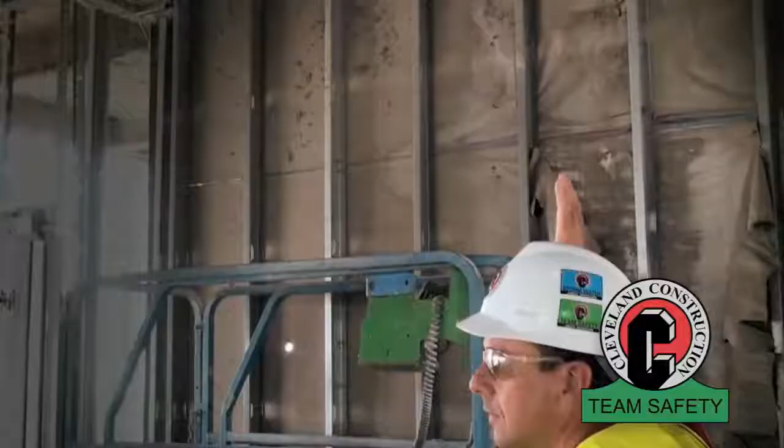To accomplish this, we believe it is extremely important to train each worker to examine their environment and become able to identify hazards, so that management can either eliminate the hazard or ensure that you're protected from its harsh effects. An accident is the occurrence of an unexpected event. Consequently, if we take the time to identify potential hazards and neutralize them, there will be no unexpected events.

Cleveland Construction has developed a program we call Job Hazard Analysis. We begin each day by examining the workplace conditions and the tasks to be performed to identify potential hazards, so that we can plan to control or eliminate them before work begins.

The Occupational Safety and Health Administration, also known as OSHA, the agency that regulates workplace safety, states that job hazard analysis is a technique that focuses on job tasks as a way to identify hazards before they occur. It focuses on the relationship between the worker, the task, the tools, and the work environment.

Ideally, after you identify uncontrolled hazards, you will take steps to eliminate or reduce them to an acceptable risk level. So it should be clear that safety is the number one priority of Cleveland Construction's employees, on and off the job site. All of our job site managers are certified competent persons.

OSHA defines a competent person as one who is capable of identifying existing and predictable hazards in the surroundings or working conditions which are unsanitary, hazardous, or dangerous to employees, and who has authorization to take prompt corrective measures to eliminate them. Because our managers are certified as competent persons, you can be sure they are skilled at directing the work on our job sites with a trained eye for the hazards associated with that work.

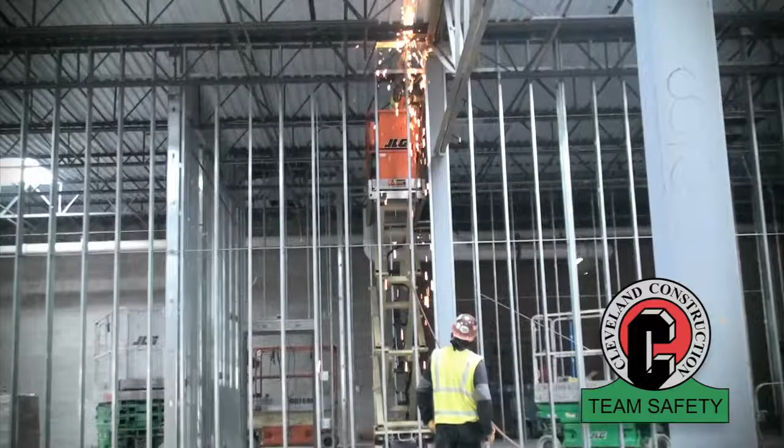Your responsibility while working on our job site is to participate in the job hazard analysis meetings. The job site managers or competent persons develop this work plan each day to identify hazards you will encounter. Because a construction site is continuously changing, everyone involved with the work being performed should contribute to helping identify potential hazards, to make the JHAs as productive as possible.

Please pay full attention to this video so you fully understand what is expected from you as you perform your work. If anything in this video is unclear or confusing, talk with your supervisor prior to going to work. This video should be viewed as a training program to prepare you to perform routine tasks on our construction site in a safe manner. If you have any questions or concerns after viewing this video, please bring them to the attention of the competent person in charge.

Lesson number 1: Personal Protective Equipment.

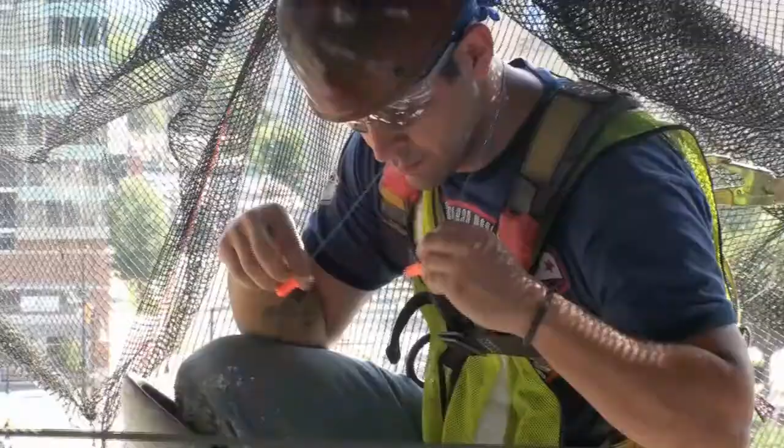Anyone working on a construction site should be aware that it is a very dangerous occupation, and you must prepare to defend yourself every moment of the day. To best defend yourself, you will need several pieces of equipment developed for the construction worker. Cleveland Construction requires you to wear certain equipment all day because threatening events are frequent and very random. Other equipment will be required on an as-needed basis.

When you have completed this training section, you will understand the required and optional personal protective equipment, how to use and care for selected personal protective equipment, and how to properly inspect your personal protective equipment. The following personal protective equipment is the minimum requirement to enter a Cleveland Construction job site.

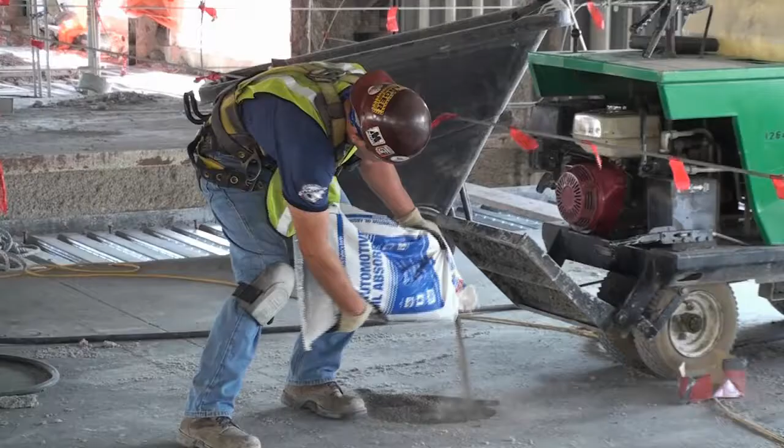Safety glasses. On a construction site, there is always debris being propelled into the air by job site tools and activity. Safety glasses must be worn by all field personnel at all times, regardless of work activity. Standard safety glasses will be issued to all employees. However, if you purchase your own equipment, it must be approved for the intended task by your supervisor.

There are various types of lenses intended for different work elements. Clear lenses are used for most work situations. Amber lenses are very useful in lower light work areas, and gray tinted sunglass style lenses are used for outdoor work in direct light. We will also provide safety glasses to be worn over prescription eyeglasses. Lens cleaning towelettes are available to keep safety glasses clear and reduce scratches.

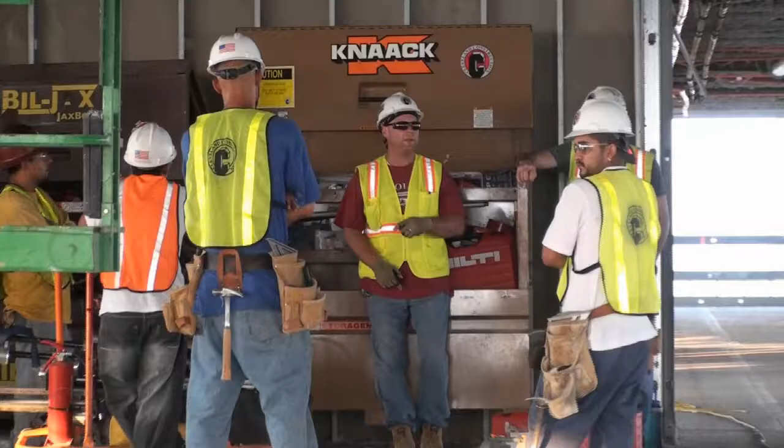Proper clothing. All workers are required to be properly clothed for a Cleveland Construction job site, which includes a shirt with at least a 4-inch sleeve, long pants, and hard-soled shoes. A 6-inch high work boot is recommended because it helps to prevent ankle twists and sprains.

Employees are also required to wear a safety vest or high-visibility shirts or outerwear. Some tasks may also require long sleeves and/or steel-toed shoes. Cut-off shirts, tank tops, muscle shirts, or tennis shoes are not permitted, along with loose clothing, baggy shirts, ripped, tattered, or dragging work pants.

Other task-specific personal protective equipment you may need include hearing protection, respiratory protection, hand protection, face shields, and safety harness.

Hearing protection. It is mandatory to wear hearing protection when you are near any such tools, equipment, or machinery that emit loud or shrill noises. Earplugs or earmuffs must be worn when using powder-actuated or gas-powered tools.

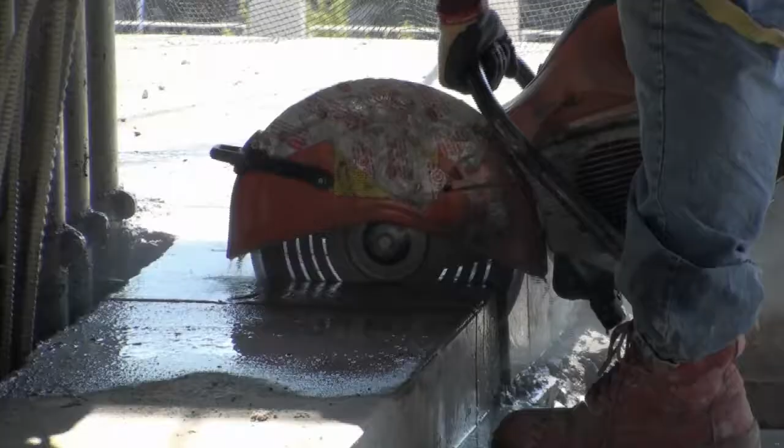Standard construction site rules state that if you are within 2 feet of someone and you need to shout to communicate, hearing protection is probably needed. Remember, if your ears are damaged by loud noises, they cannot be fully restored to their original efficiency.

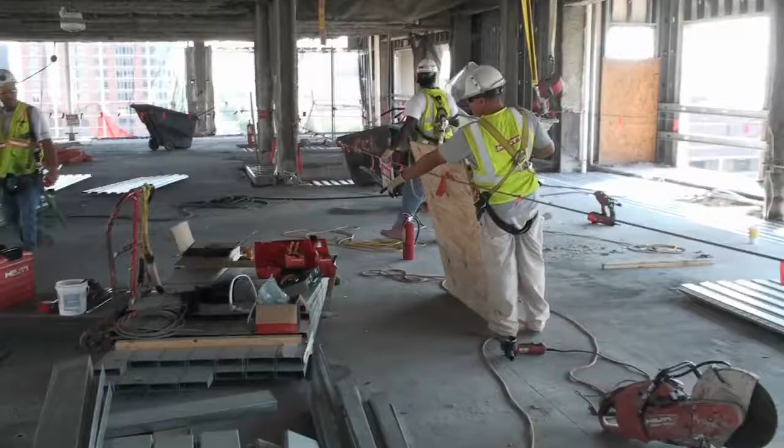Respiratory protection. Although respiratory protection is not required by Cleveland Construction for the customary work we perform, we have established a voluntary respirator use policy. We will supply an N95 dust mask to any employee looking for an additional level of comfort and protection while working with fiberglass, fireproofing, sanding drywall, sweeping the floors, or handling lead-lined drywall upon your request.

All other requests for a respirator will be evaluated on a case-by-case basis. If you have any concerns regarding respiratory hazards, talk with your supervisor.

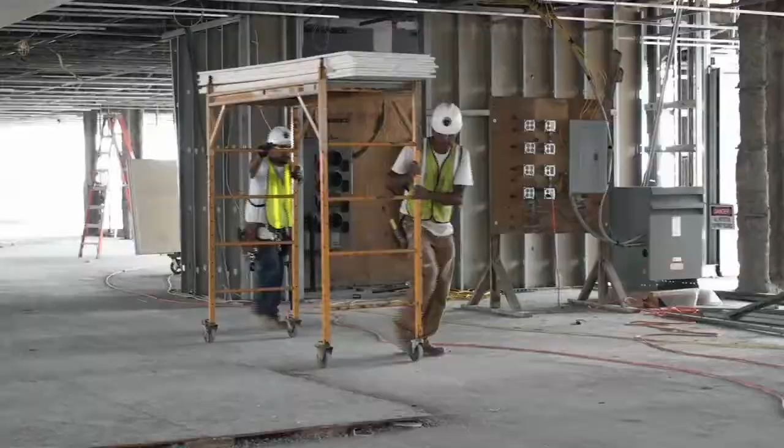Hand protection. Cleveland Construction supplies several types of gloves to defend against cuts and damage to your hands when handling materials or equipment. Gloves should be worn during cleaning operations, when working with fiberglass, lead-lined drywall, cutting metal studs, and as directed by your supervisor.

When wearing gloves near moving parts, be mindful that they can get caught and pull your hand into danger. If you have any concerns on whether or not you should be using gloves while performing your work, talk to your supervisor. Face shields. A full-faced shield shall be worn in addition to safety glasses when working in an area with flying or floating debris, such as operating a chop saw, disaster saw, or grinder.

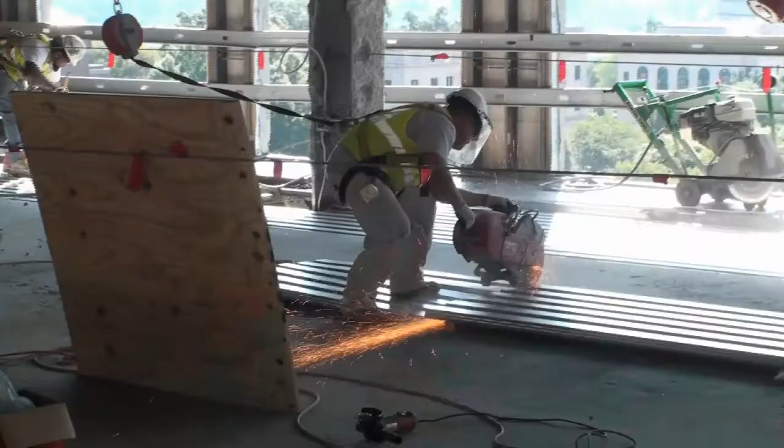In addition, an approved welding hood with a face shield must be worn during all welding operations. When working with spark-producing activities, you are required to have a fire extinguisher in your immediate work area.

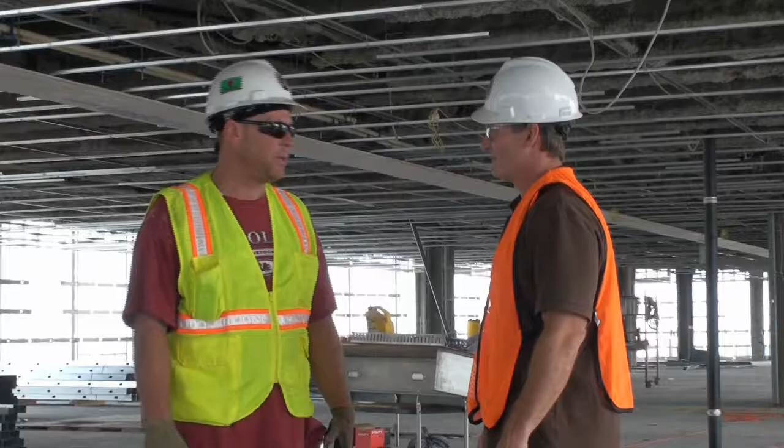Donning a harness. Occasionally, you will be required to wear a full body harness as part of the fall protection system. It is important to wear this equipment properly, as improper use can result in serious physical harm. Before donning your harness, be sure to inspect for nicks, cuts, tears, frays, and any deformation of the metal components. If you suspect your harness of being deficient in any way, bring it to the attention of your supervisor.

Remember to follow these steps when donning a harness. Step 1. Hold the harness by the D-ring. Shake the harness to allow all of the straps to fall in place.

Step 2. If the chest, leg, and/or waist straps are buckled, release the straps and unbuckle them at this time. Step 3. Slip the harness over your shoulders so the D-ring is located in the middle of your back between your shoulder blades.

Step 4. Pull the leg strap between your legs and connect it to the opposite end. Repeat with the second leg strap. Step 5. Connect the chest strap and position it in the mid-chest area. Tighten it to keep your legs and shoulder straps taut.

Step 6. After all straps have been connected, tighten all buckles so that your harness fits snug but allows for full range of movement. Finally, pass the excess strap through the loop keepers.

Additional safety equipment used for fall protection, such as lanyards, lifelines, and others, will be reviewed in Lesson 2, Fall Protection. It's very important to thoroughly inspect all personal protection equipment daily. Use it properly, and always wear your equipment when it is required.

Let's do a quick review of this lesson.

Remember that potentially dangerous situations exist on every job site, and personal protective equipment is developed to protect you from serious workplace injuries. Cleveland Construction requires that hard hats and safety glasses be worn at all times on the job site. Under our voluntary respirator use program, we will provide an N95 dust mask for extra protection upon your request. Always remember to inspect your personal protective equipment before using it, as it is your last line of defense. Think about the work to be performed to ensure you have the proper equipment to protect yourself.

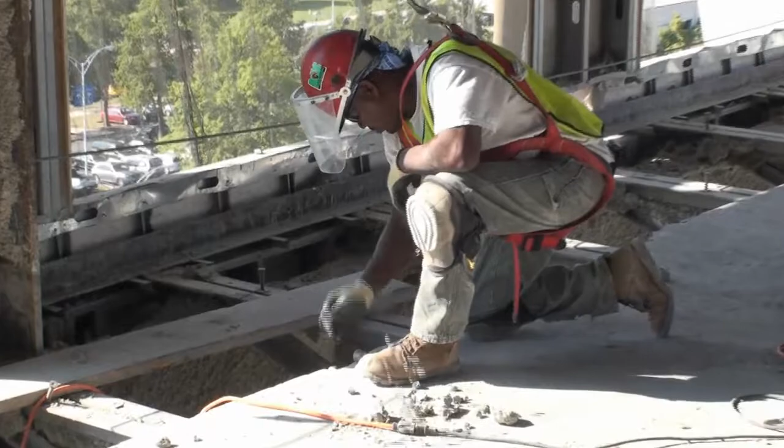Lesson number 2, Fall Protection.

In the construction industry, falls are the leading cause of worker fatalities. Each year, on average, between 150 and 200 workers are killed, and more than 100,000 are injured as a result of falls at construction sites. Consequently, OSHA has identified falls as one of the top 4 types of fatalities, along with struck by, caught between, and electrocutions.

These 4 injuries are known as the Focus 4. Cleveland Construction Incorporated has joined OSHA to inform you about these hazards, the methods used to isolate these conditions, and supply the equipment necessary to protect you. Upon completion of this training section, you should understand the hazards of falling, various fall protection systems used on the construction site, and the personal equipment available to employees to protect them from falls.

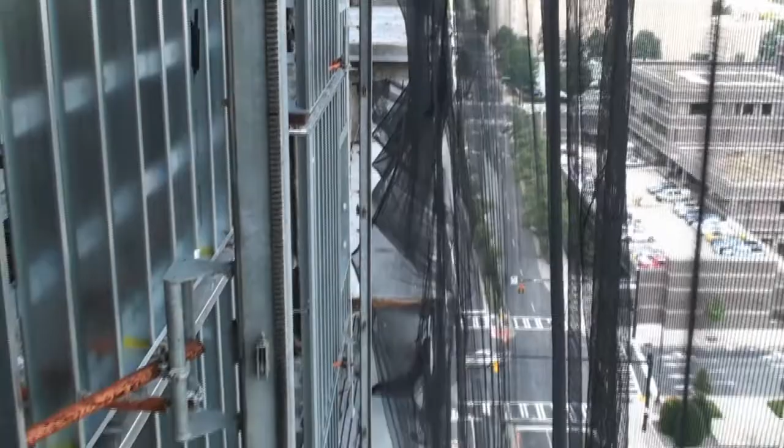Trigger height for fall protection. OSHA has established that construction workers who are on a working or walking surface and are exposed to a potential fall of 6 feet or more must be protected with the use of guardrails, safety net systems, or a personal fall arrest system. When working on a scaffold, those same protections are required when the work platform is more than 10 feet above a lower level.

Safety net systems are seldom used in commercial construction and most often used for bridge work. For this reason, we will focus our discussion on the guardrail and personal fall arrest systems.

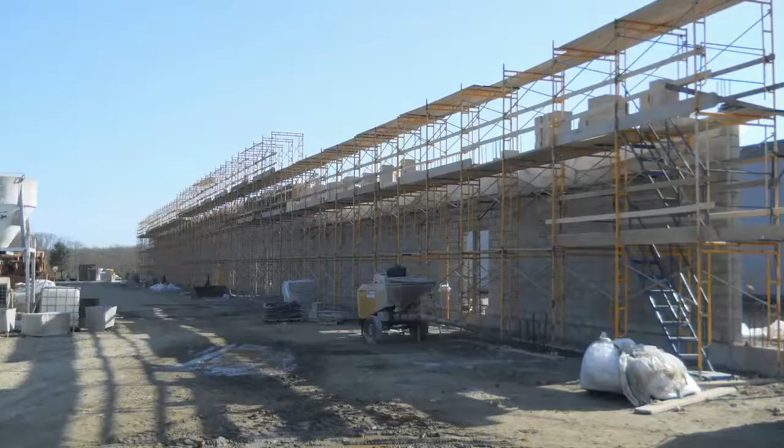Guardrails are the most common form of fall protection used around the perimeter of a structure and around large floor openings. They are commonly constructed according to rigid specifications and made of 2x4 wood construction or steel cabling. Guardrails are usually made from the same steel used for the scaffolding frame. Occasionally, wood 2x4s or chain material may be used on scaffolding. Regardless of the materials used, all guardrails must be constructed to meet the rigid specifications to offer the same degree of protection.

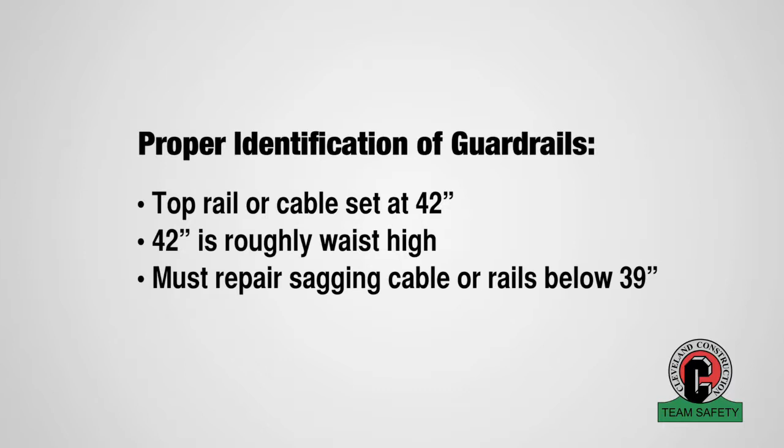Although it is not necessary for you to know the exact specification of the installation of guardrails or scaffolding, you must know if the guardrails appear to be adequate. To be adequate, the top rail of the guardrail, or top cable if wire rope is used, is to be set about 42 inches above floor level, or about waist high. If any part of the guardrail or cable sags below 39 inches, employees cannot work until it is repaired.

You will occasionally see what appears to be a flimsy guardrail system. They are not guardrails and are not built to the guardrail specifications. They are constructed using rope, wire, or chains strung from stanchion to stanchion and identified with bright colored flags or ribbons. These areas are being protected with a warning line system, or as a controlled access zone. They are set up under special conditions to keep workers away from dangerous areas, such as unprotected building edges, floor openings, and bricklaying operations, to indicate that fall protection is required beyond that point, or that only trained, skilled workers are permitted beyond that point.

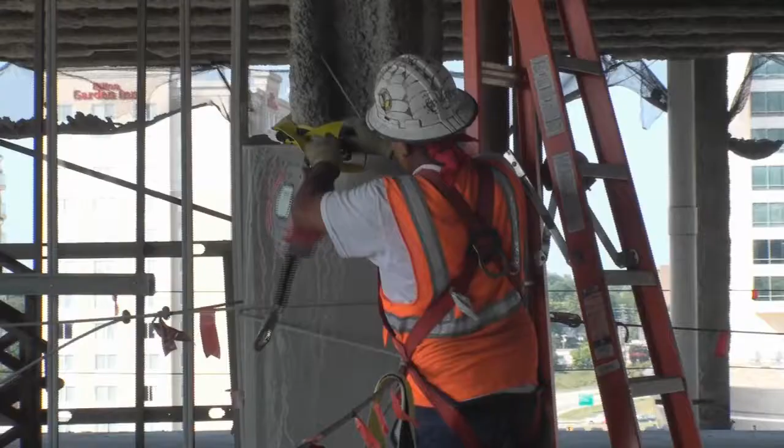If it is necessary for you to work inside a warning line system, you will be required to be tied off to the structure with a personal fall arrest system, and only workers with the proper training can enter a controlled access zone. Personal fall arrest system.

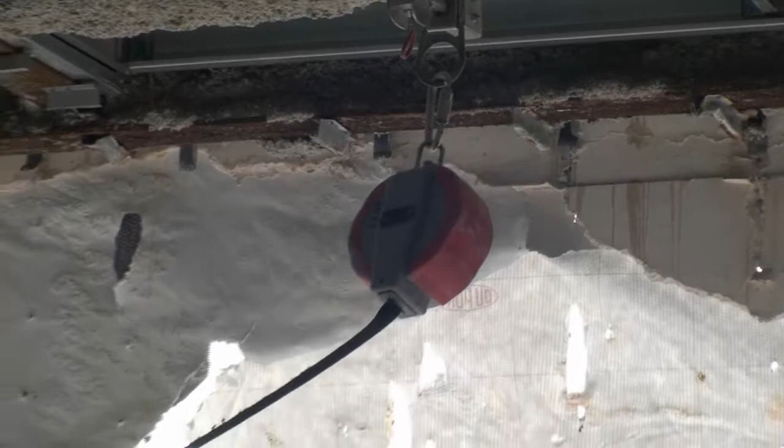A personal fall arrest system consists of a full body harness connected to a lanyard with a deceleration device connected to an anchor point. When this equipment is set up properly, it will not permit a free fall of more than 6 feet, because in a fall you increase speed, which places more stress on the equipment and causes a greater jolt to your body. For this reason, it is necessary to attach the equipment so as to take as much slack out of the lanyard as possible by attaching to an anchor point over your head.

Let's take a better look at each piece of equipment. Full body harness.

This is a garment made of rugged nylon straps that is worn by the worker, which will cradle his body if he should fall. Adequate supplies of these items of personal protective equipment, PPE, are on the job site solely for the protection of our employees. If the equipment is not offered to you and you feel that you are exposed to a fall, ask your supervisor for the equipment before you begin work.

We know that you must feel safe and comfortable to produce good work. When you use a harness, make sure that you use all of the adjustable features to snug the harness to your body in case you fall.

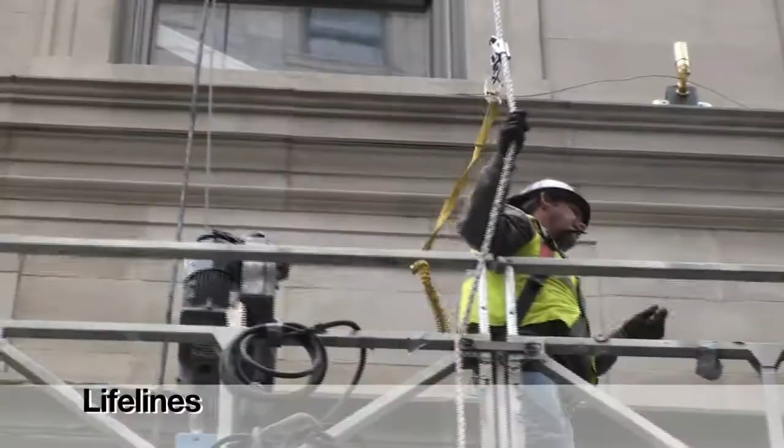Lifelines. A vertical lifeline is a long rope usually attached to the roof of the structure and hangs down the side of the building, so when working on a swing stage, you can use a special device called a rope grab to attach their lanyard to the lifeline, completing the fall protection system. A horizontal lifeline is a long rope that has both ends attached to two parts of the structure using a tie-off adapter, allowing usually two workers to attach their lanyard to O-rings on the rope to complete the fall protection system.

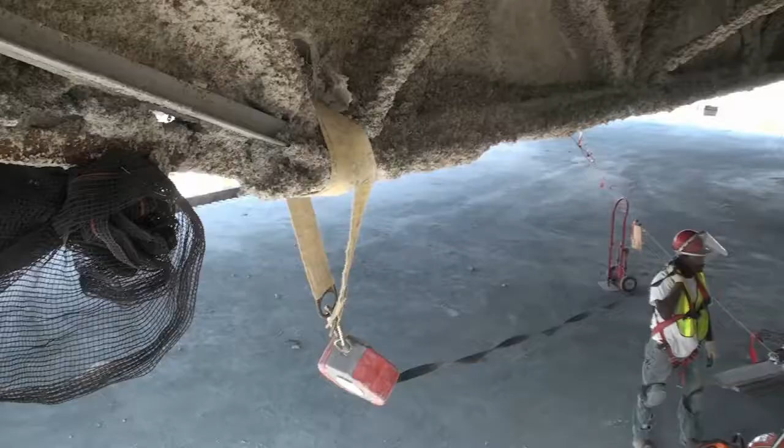Lanyards are available in either a fixed or a variable length style, sometimes called an adjustable or retractable lanyard. The lanyard is designed so that one end can be attached to the D-ring on the back of the harness, and the other end is attached to the anchor point. The major consideration for selecting the style and length of a lanyard is freedom of movement for the worker and limiting the free fall distance as much as possible.

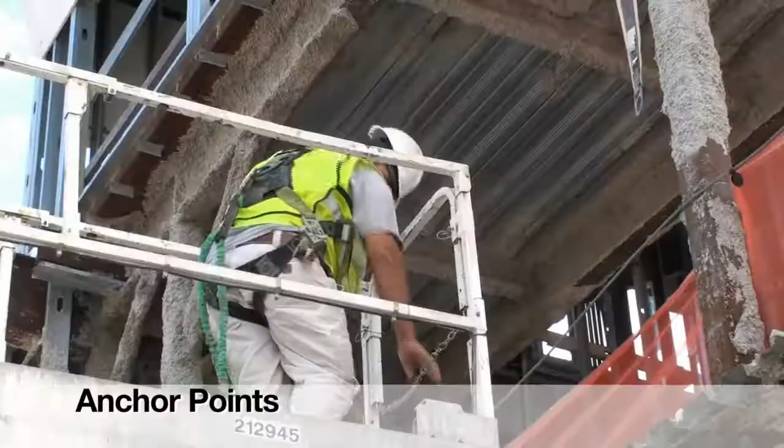Anchor points. Occasionally, the structure and the personnel lifts will be designed with a built-in anchor point. Otherwise, it is necessary to establish an anchor point with the use of a portable device designed for this purpose. An anchor point must be capable of supporting 5,000 pounds, so the equipment used must be designated for that capacity. There are several portable anchor items that are manufactured to meet the specifications.

Tie-off adapters are woven nylon belts designed to be wrapped around substantial parts of the structure. Beam clamps attach to the bottom flange of an I-beam. Concrete anchors are drilled into set concrete, and roof anchors can be installed into almost any roof.

Falls on the same level. Trips, slips, and falls from walking and working surfaces account for 15% of all accidental deaths in the construction industry. These simple housekeeping steps will prevent such accidents: keep all walking and working areas clean, dry, and free of clutter and debris, and keep materials and supplies neatly stacked.

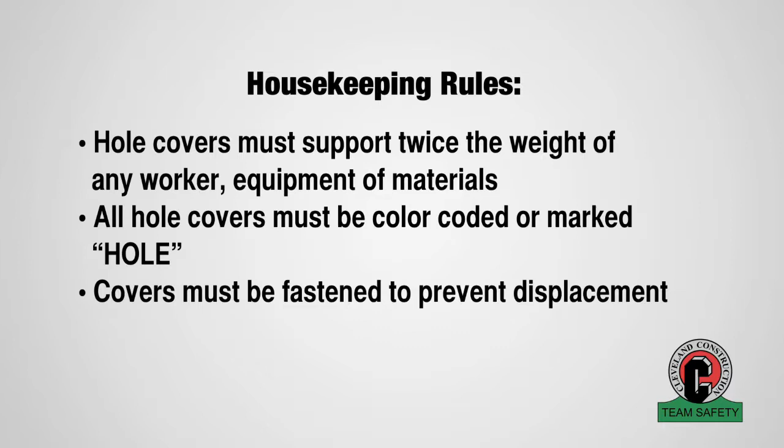Holes must be covered with a material capable of supporting at least twice the weight of employees, equipment, and materials that may be imposed on the cover at any one time. All covers shall be color-coded or marked hole or cover and fastened to prevent displacement. Special attention must be paid to housekeeping and keeping working areas clear when any work is performed on stilts. Follow the manufacturer's recommendations on the safe working height for the stilts used.

Impalement hazard. When working above protruding reinforced steel, additional protection against impalement will often involve the use of steel reinforced covers or wooden troughs.

Falling objects. To protect yourself from falling objects, Cleveland Construction requires you to wear your hard hat at all times. There are additional measures that need to be in place to ensure that objects do not fall onto people working or walking below during construction. The following are controls to prevent or minimize the risk of falling objects.

Mesh, toe boards, and screens provide falling object protection to people below. Canopies can be used between the falling object hazard and employees and must be strong enough to withstand the impact forces of the potential falling objects. Barricaded areas are sometimes established to keep workers out of areas where objects or materials may fall.

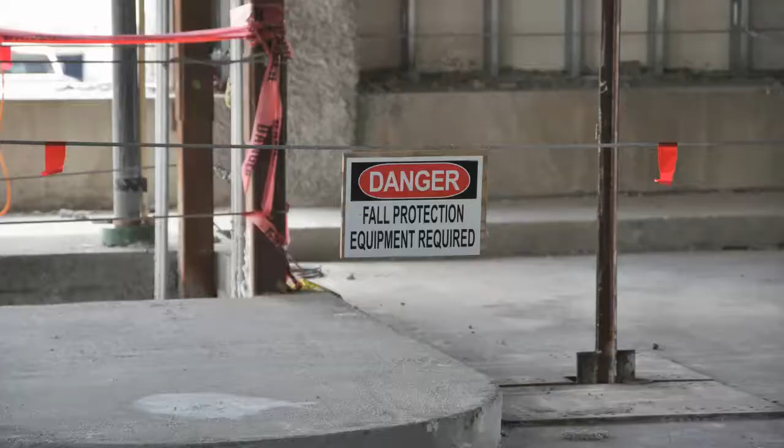Let's do a quick review of this lesson. Falls are the top cause of fatalities on construction job sites. Always wear and use the proper fall arrest equipment. Respect warning lines and controlled access zones. Cover and secure floor openings and maintain a neatly organized work area to prevent slips and trips. It is ultimately your responsibility to pay close attention to what is happening around you at all times.

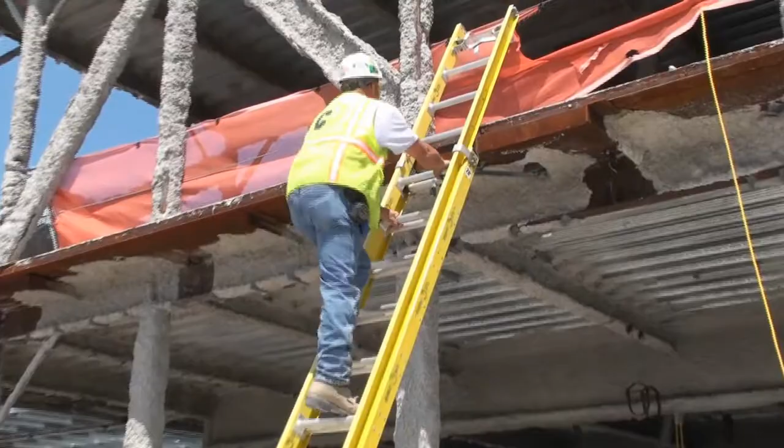Lesson number 3: Elevated work platforms. In many situations, employees are required to perform tasks on elevated levels. Elevated work platforms pose fall hazards. There are many different styles and safety operations of lifts designed for various locations and conditions. Knowing the safe operation for elevated work platforms will eliminate injuries and save your life and others.

When you complete this training section, you will be familiar with some of the most common types of elevated work platforms you will encounter on the job site. You will understand the safe operation and use of various elevated work platforms, be able to identify which elevated work platform is most appropriate for the task, and understand which elevated work platform operations require additional training. Cleveland Construction uses several types of elevated work platforms to raise workers up to higher work areas. The most common elevated work platforms are ladders, scaffolds, personnel lifts, and stilts.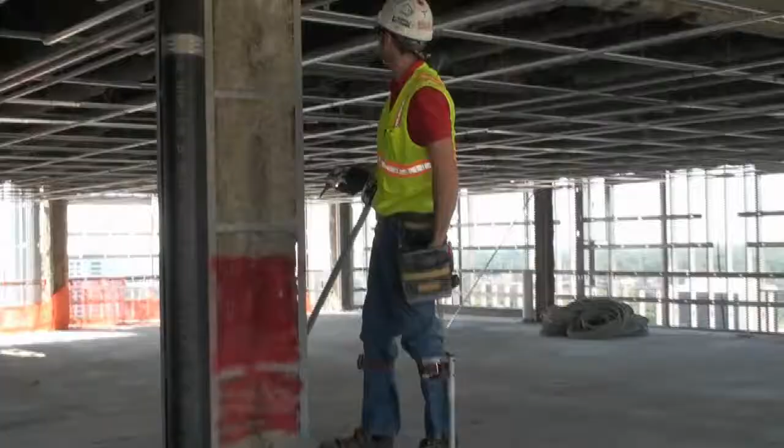Ladders. There are two basic types of ladders you will encounter in your work: the extension or straight ladder and the step ladder. Take the time to analyze what type and size ladder is best suited for you to safely perform your work.

Extension and straight ladders should extend 3 feet above the upper surface you intend to access. The base of the ladder should be positioned at a distance from the wall equal to 1/4 of the height at which the ladder touches the wall.

Tying the top of the ladder to the structure before the first use will prevent side-to-side shifts or falling backwards. Always keep the area around the top and bottom of the ladder clear of obstructions.

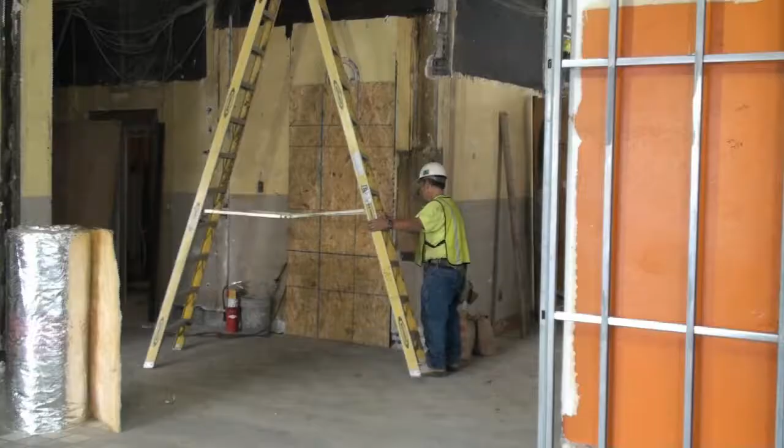Step ladders must be fully opened and secured. Leaning them against a wall or structure is strictly prohibited. Never stand on or use the top platform or the step below the platform to perform work. If more height is needed, use a taller ladder.

While moving up and down ladders, always face the ladder and maintain 3 points of contact, keeping 2 hands and 1 foot, or 2 feet and 1 hand, on the ladder at all times.

Do not reach out too far when working on a ladder. A good rule of thumb is to remember to keep your belt buckle within the side rails of the ladder while performing any task to maintain proper balance.

Inspect all ladders before using. Follow warning labels and report any damaged ladders to your supervisor prior to placing in service.

Refrain from carrying tools and other materials while walking up and down the ladder. Utilize a hoisting system to move tools to working areas.

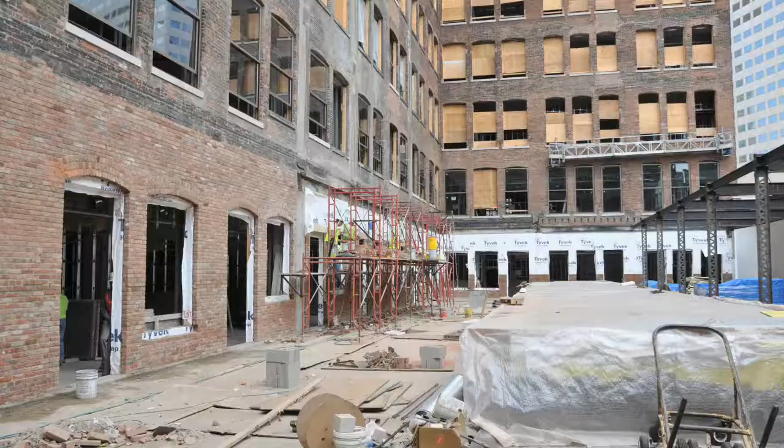When a scaffold work platform is more than 10 feet above a lower level, all workers must be protected from falls with a guardrail or safety net system or personal fall protection equipment.

When scaffold platforms are more than 2 feet above or below a point of access, a ladder, ramp, walkway, or stair tower must be used to access the platform.

All working levels of a scaffold platform must be fully planked between the ends of the uprights. When work platforms are less than 18 inches wide, fall protection must be used to protect all employees regardless of height.

When working with a mobile scaffold, you must lock the wheels or casters at all times before climbing up to the work platform.

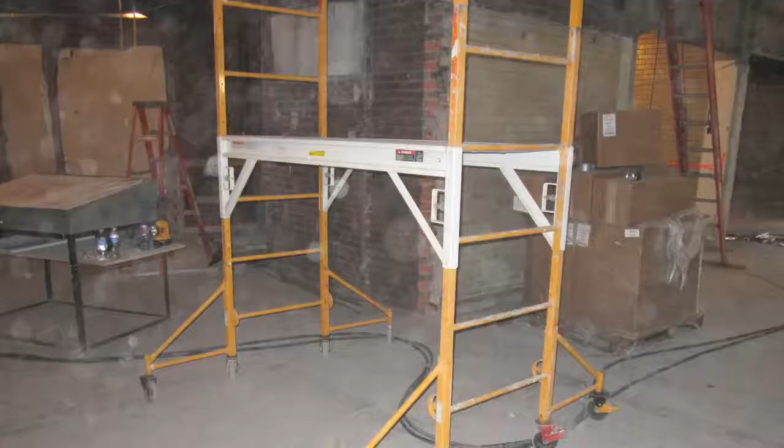When the scaffold is set up within 14 inches of a wall, outriggers on the wall side of the scaffold need to be removed and all wheel locks must be locked. All 4 outriggers must be installed if the scaffold is being used more than 14 inches from the wall.

Scaffolds must be kept free from debris, ice, and any other substance that may make the surface slippery.

The interior multi-purpose scaffold can be 6 feet, 8 feet, or 10 feet long, but because it is only 29 inches or 30 inches wide, it can be dangerous unless it is built and used according to the manufacturer's instructions.

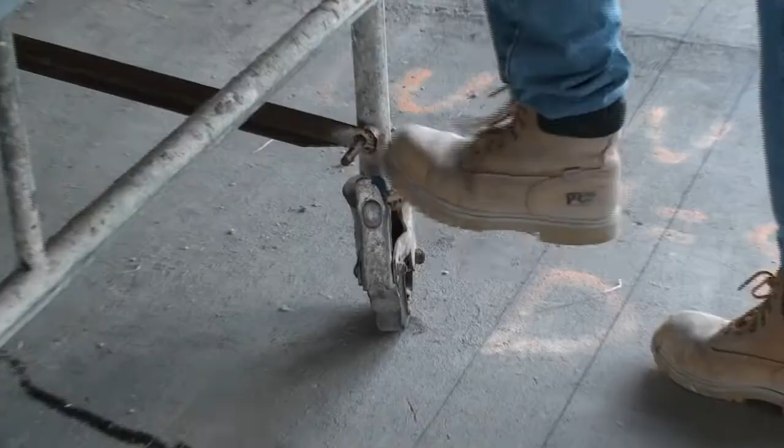When setting these scaffolds in a stairway, you must remove the casters or wheels and replace them with base plates. Before stacking sections of these narrow scaffolds, the outriggers must be installed at all 4 corners to prevent tipping.

Because these scaffolds are so narrow and workers forget and back off the platform, Cleveland Construction's company policy is to install a guardrail on open sides at any level when it will not interfere with the operation of the scaffold or create an unsafe condition.

Inspect all equipment before using. Remove from service all defective or damaged parts. Consult the competent person for scaffolding before altering or modifying any scaffold.

Personnel lifts. Often, the most efficient means to performing work at elevated levels is the use of a personnel lift, the boom or basket lift, or the scissor lift. This equipment is more efficient and safer than ladders, scaffolding, and a swing stage when used properly.

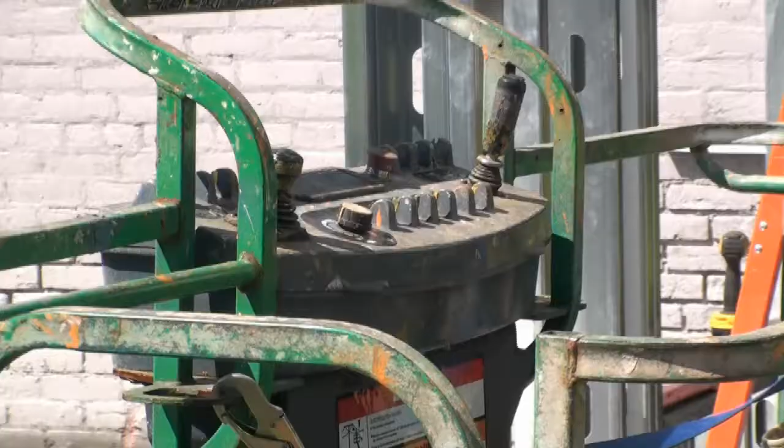Never operate equipment until you have been trained and you completely understand the functions. Read the safety manual that is in the plastic box or tube located on the equipment before operating this equipment. If the manual is missing, immediately inform your supervisor.

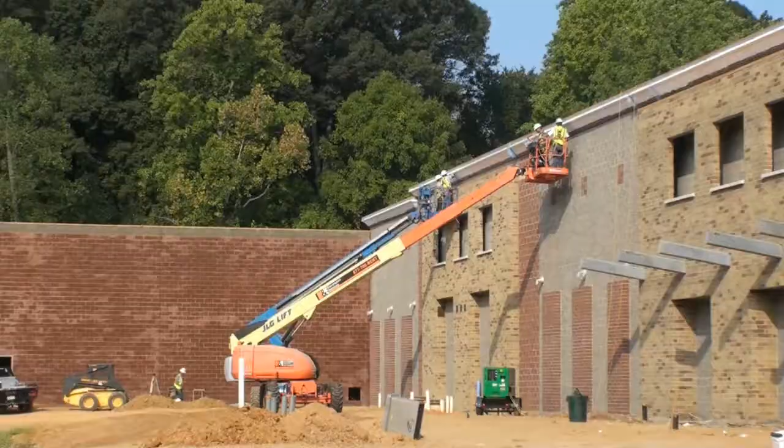Inspect the lift at the beginning of each shift and notify your supervisor about any needed repair, problems, or malfunctions of the equipment. Inspect the work area before and during use with special attention to drop-offs, holes, bumps, obstructions and debris, and any overhead obstructions and electrical wires.

The main safety precautions that are mandatory before use of personnel lifts each day are locating the overhead clearance and nearby energized power lines. The following should also be checked before each and every operation of a personnel lift.

Outriggers, stabilizers, or extendable axles deployed if equipped. Guardrails in place and gates or chains closed. Load limits and distribution of load on the lift. All safety gear required for the work. Slopes and grades of work area do not exceed manufacturer's rating.

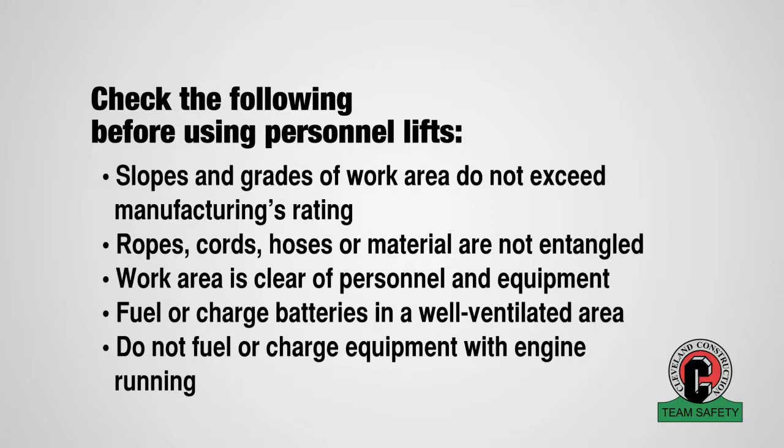Ropes, cords, hoses, or material is not entangled in the platform mechanism. Work area is clear of personnel and equipment. Fuel and charge batteries in a well-ventilated area, free of flames, sparks, and other hazards. Do not fuel the equipment with the engine running. Here are a few additional safety regulations to remember while working on lifts.

OSHA has identified not climbing on guardrails as one of the most important aspects of lift safety. The deaths due to climbing the rails have increased drastically in the past few years.

Additional regulations are: do not attempt stunt driving or horseplay with the equipment. Do not move the lift before checking the travel route. Do not leave the lift unattended without protecting it against unauthorized use. Do not use a personnel lift as a crane. Keep your feet on the floor of the lift basket.

The one very basic difference in the scissor lift and the boom lift is the fall protection requirements. When using a scissor lift, the guardrail system is the only fall protection needed as long as you keep both feet on the floor of the lift.

In the boom lift, due to a much greater potential for ejection, you must be fitted with a harness and lanyard, and you must be tied off to the anchor point on the lift platform at all times. While operating boom or scissor lifts, you are not permitted to remove one foot from the floor of the lift or stand on the guardrails.

To exit a lift at various heights, you must use a scissor lift, not a boom or basket lift. Position the lift so that the gate of the lift is aligned with the structure to permit a level and unobstructed transition from lift to the structure.

You must have two lanyards attached to your harness for the following procedure. With one lanyard attached to the lift, you must attach the second lanyard to the structure. A substantial structure must be able to hold 5,000 pounds. In this case, ductwork, pipes, and conduit cannot be used.

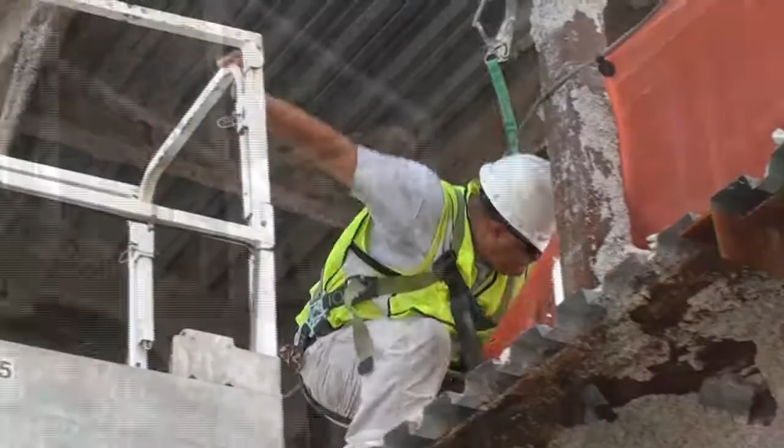Immediately detach the lanyard attached to the lift. The reverse process is to be used to get back into the lift. If the requirements of this system are not clear to you, or if you encounter any difficulty using this equipment, notify your supervisor immediately.

Stilts. When working on stilts, the most important thing to remember is to keep all work areas clear of materials, cords, and anything that could pose a trip hazard. You must read the manufacturer's recommendations for the use of this equipment to become familiar with its limitations.

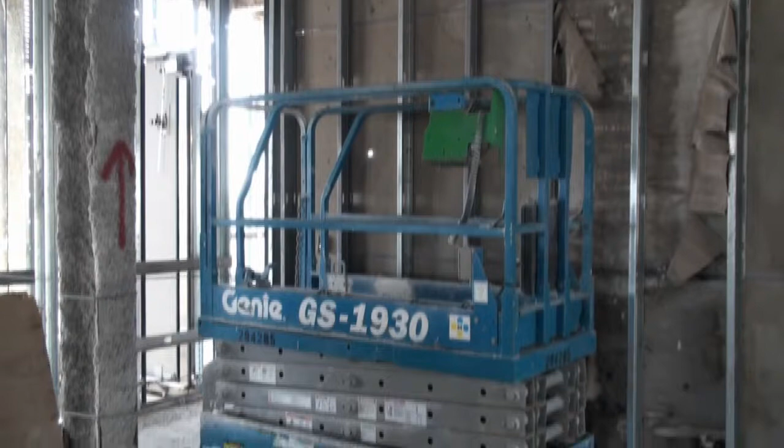Special considerations. Before using an elevated platform, you must inspect the work area for electrical power lines to see if they are within 10 feet of your work area. If your work is within 10 feet of a power line, you must have your supervisor make sure that the power to those lines has been shut off, or that the power lines have been isolated by a competent person to prevent contact.

Another safety issue that arises during the use of elevated work platforms is falling objects. The main focus while working on elevated work platforms is to prevent tools, materials, and equipment from falling from the platforms. Toe boards, paneling, and screening line the platform and help prevent falling objects. When all objects cannot be contained on the platform, the area must be barricaded below and/or canopies must be used for the protection of people walking or working below.

Let's do a quick review of this lesson.

Some of the elevated work platforms you will encounter include ladders, scaffolds, personnel lifts, and stilts. It is important to choose the most appropriate and safest elevated work platform depending on the work to be completed.

When working on ladders, be sure to use the proper length and height ladder, and maintain 3 points of contact. Extension ladders should extend 3 feet above the working surface and be secured at the top.

When working on scaffolding above 10 feet, fall protection is required. Only individuals trained to build scaffolding can erect scaffolding on the job site.

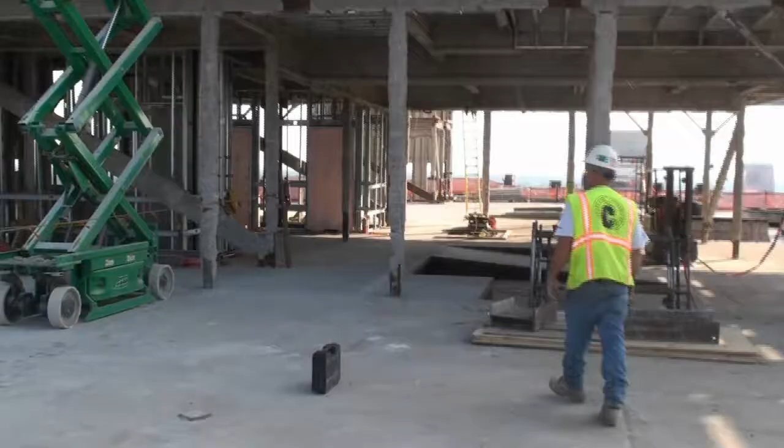When working in personnel lifts, pay attention to overhead obstructions so as not to get any part of your body caught between the lift and the obstruction. Never stand on or climb guardrails.

When working in a boom-type lift, you must be tied off to an anchor point in the lift at all times. If you are unable to follow the established safety rules in order to perform your work, you must talk with your supervisor and/or the safety department to determine how the work will be accomplished.

Lesson number 4. Material handling and storage.

There are right and wrong ways to prepare, lift, and transport materials on a construction job site, and it is your responsibility to follow the best work practices.

Even with the increased use of machinery and equipment, most materials are moved by hand during some phase of construction. Back, knee, and foot-related injuries frequently occur if you don't use caution. The improper handling and storage of materials often results in costly and incapacitating injuries.

Whether moving materials manually or mechanically, you must know and understand the potential hazards associated with the task at hand, and how to control your workplaces to minimize the danger.

Because numerous injuries can result from improperly handling and storing materials, you should be aware of proper work practices. When you complete this training section, you will understand how to identify the most common material handling hazards and the methods for eliminating or at least minimizing the occurrence of material handling accidents.

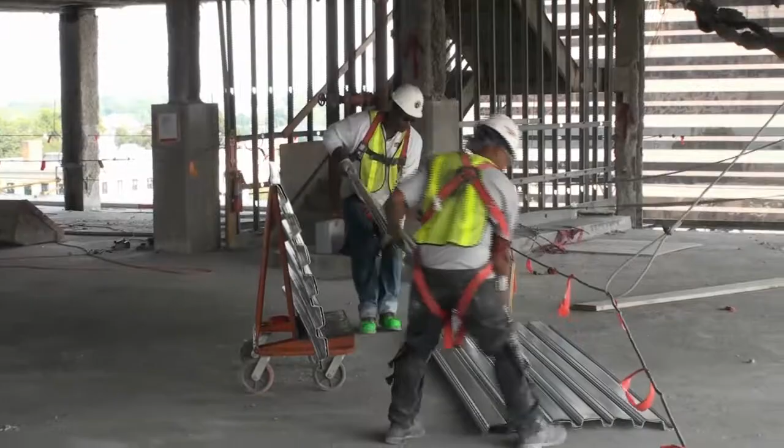Manual materials handling. Preparation on the job site can save you and your body from aches and pains. A 5-minute stretch or warm-up is recommended each day to prevent injuries.

One of the most overlooked areas of material handling is protruding nails. Prior to lifting, pull all protruding nails off of your load or bend them flush. Clean up jagged, sharp metal edges, and wear gloves whenever cuts, splinters, blisters, or other injuries are possible.

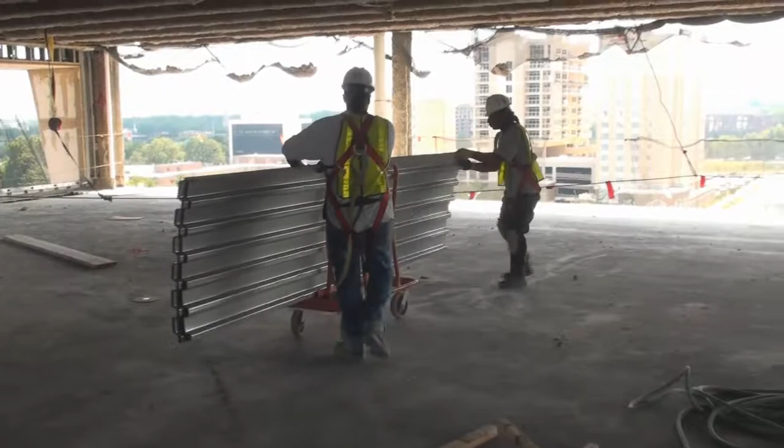Set materials, tools, and other objects on pallets for easy lifting. When lifting objects and tools, be sure to know the weight of what you are lifting and utilize help with heavy or awkward loads. Remember to work smart and not beyond your actual physical ability.

Keeping the lift load close to your body, your back straight, and lifting up with your legs will save you from sprains and muscle pulls. When making sudden turns, changing the position of your feet will prevent back twists and other injuries.

If you can't handle the material comfortably alone, get help and let the person know when you will let go of the load.

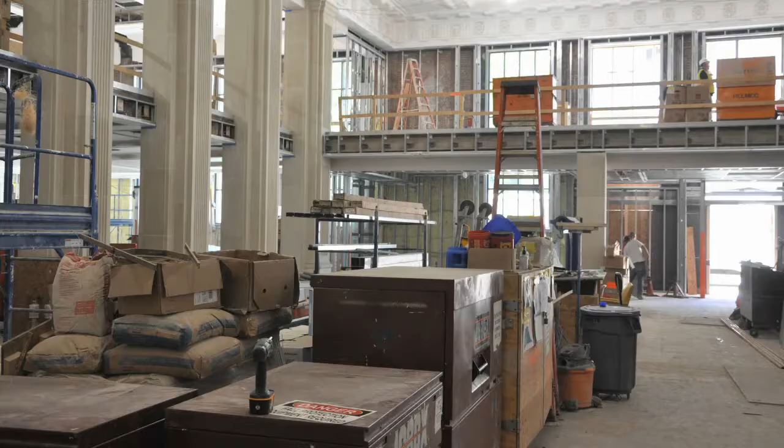Material storage. All materials and tools used on the job site should be stored properly when not in use to avoid accidents, injuries, wasted materials, and project delays. Neat and proper storage can prevent accidental falls, falling objects, and injuries.

When storing materials, there are 6 basic rules to ensure proper storage and good housekeeping. Number 1: Keep total weight within the safe loading limits of the building's floor. Number 2: Keep passageways clear. Number 3: Control materials so that they do not slide, fall, roll, or collapse.

Number 4: Provide cribbing for heavy loads on unstable surfaces. Number 5: Store materials away from traffic. Number 6: Place stored materials at least 6 feet away from floor openings, and at least 10 feet away from a building edge if walls do not extend above the top of the material.

Mechanical material handling. Similar to manual material handling, mechanical material handling requires the same extensive preparation and regulations. Knowing the weight and capacity of the handling device can also prevent accidents and injuries.

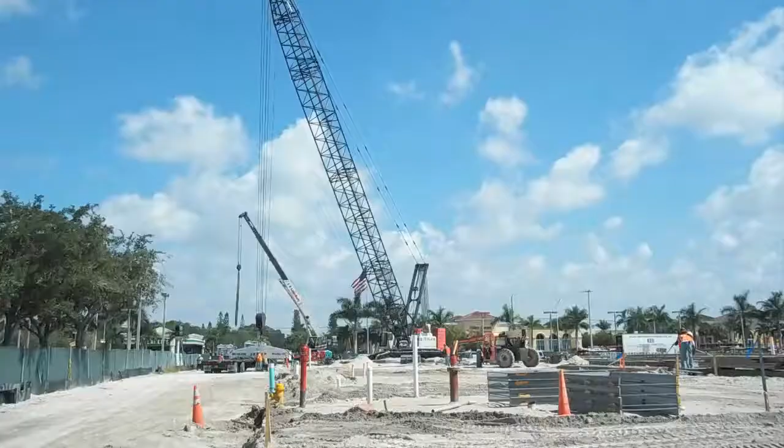The capacities of cranes, forklifts, chain fall, come-along, and other mechanical material handling equipment are all different. Knowledge of these different capacities can save you and other workers.

Mobile and heavy equipment. Special training or certification is required to operate heavy equipment such as front-end loaders, forklifts, cranes, or trucks. Struck-by accidents are one of OSHA's top 4 causes of fatalities.

It is the responsibility of all ground personnel to be aware of certain safety measures while working around heavy equipment. Ground personnel should stay in the operator's vision at all times and out of blind spots. Never position yourself directly behind a piece of equipment, as the operator will not be able to see you.

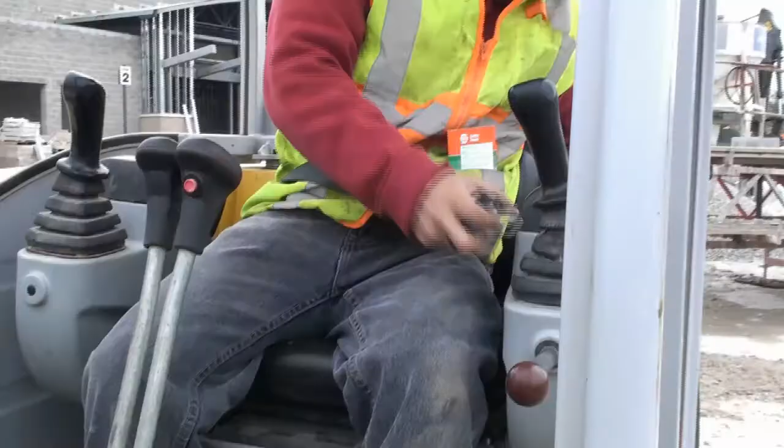Wearing your required high-visibility vest and establishing eye contact before entering a machine's area of operation will ensure you're recognized by the operator. You must wear your seatbelt at all times while operating material handling equipment.

Operating machinery should have an audible backup alarm. Any equipment with defective alarms should be pulled from service and repaired.

Let's do a quick review of this lesson.

It is important to remember to get extra help when an object is too heavy or bulky to lift or move by yourself comfortably. When lifting heavy material, bend at your knees and keep your back straight.

Proper material storage keeps passageways clear and materials away from heavy traffic areas. It is important to understand the capacities of any material handling equipment you use. You have a responsibility to operate in a safe manner while working around heavy equipment.

Make sure to examine your workplaces to detect any unsafe or unhealthful conditions, practices, or equipment and take corrective action for you and your coworkers' safety.

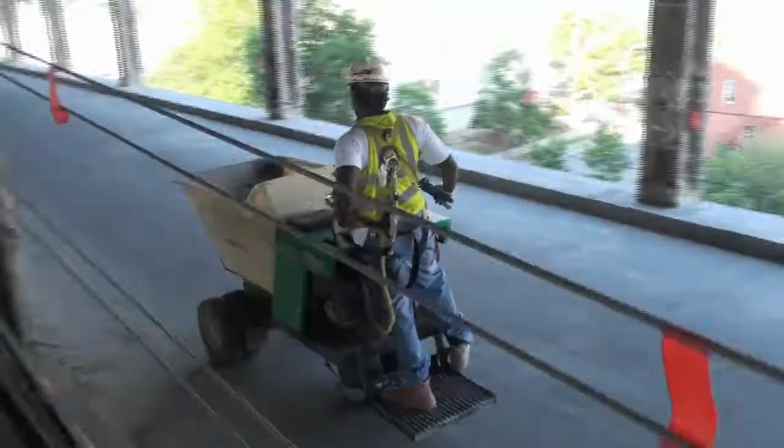Clear your way. Examine the entire route you will be using to move the material from one location to another before you begin. Clear debris and obstructions that may hinder your passage. Select a route that offers fewer challenges, steps, ramps, and sharp turns.

Accidents result from unexpected events. Planning reduces the unexpected. Lesson number 5, Power Tools and Electrical.

Power tools help us to easily perform tasks that otherwise would be difficult or impossible. However, these simple tools can be hazardous and have the potential for causing severe injuries when used or maintained improperly. Special attention toward power tool safety is necessary in order to reduce or eliminate these hazards.

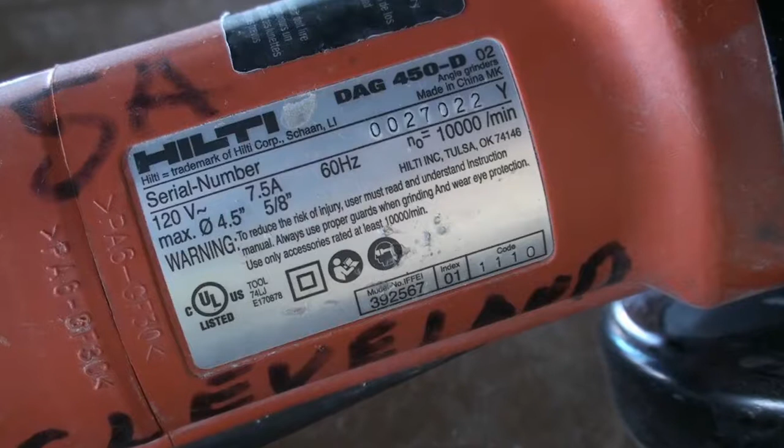Be sure to follow the manufacturer's recommendation and instructions for product use at all times. If you are not familiar with the proper use of a tool or equipment, talk with your supervisor. Never use equipment when it is marked out of service.

To ensure the safety of others, if you come across a defective tool not labeled, please label it and describe what is defective. Then turn in the defective equipment to your supervisor for repair.

When you complete this section, you will understand the proper use, safety, and maintenance of powder-actuated tools, good safety practices related to electrical power, and the safe operation of lasers.

Powder-actuated tools. The use of powder-actuated tools will be restricted to you until you have been properly trained for the safe use of the specific tool you'll be working with.

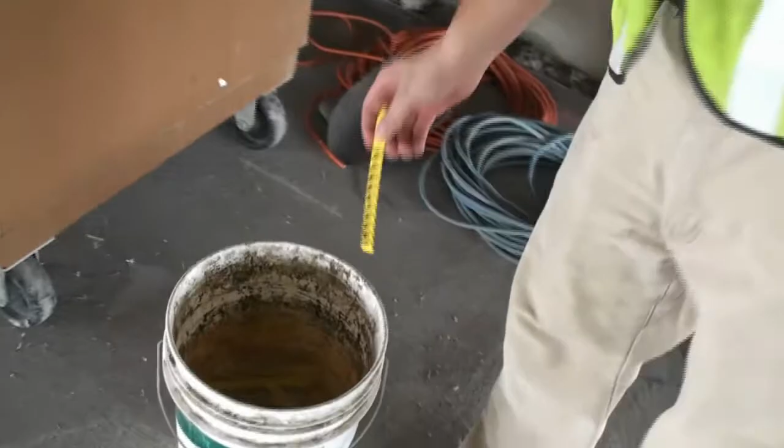These tools offer the same hazards and safety considerations of a firearm. If you have not been trained or feel unfamiliar, you should not use this equipment and inform your supervisor.

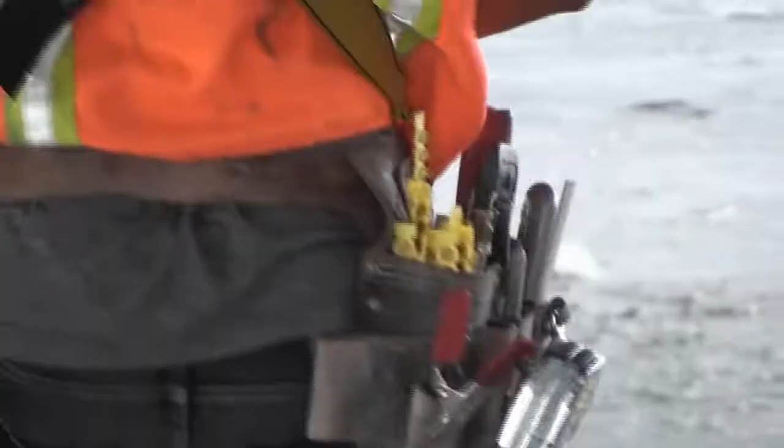Employees using powder-actuated tools must wear safety glasses with side shields and earplugs at all times. Inspect each tool every day prior to loading it for use to determine that all parts and safety devices are in proper working condition. Only use manufacturer fasteners and powder loads, and make sure you understand the manufacturer's instructions.

When operating, always hold the tool perpendicular to and firmly against the intended work surface. Always make a test fastening with the lowest power level load recommended for the tool. Powder load identification is identified by color, and using the wrong load can be very hazardous.

The following safety precautions must be followed when using powder-actuated tools. Do not load the tool until ready for use. Never load a fastener with your finger on the trigger. Do not point the tool, loaded or empty, at anyone. Do not use the tool in an explosive or flammable atmosphere.

Do not drive fasteners into any chipped area or very hard or brittle materials. Do not drive fasteners into easily penetrated or thin materials unless backed by a material that will prevent the fastener from passing completely through the other side. And do not leave loaded powder-actuated tools unattended.

Pick up and properly dispose of all cartridges. Non-discharged cartridges are to be disposed of in water. Always store the tool unloaded so that untrained workers cannot accidentally discharge the tool.

If you are operating a powder-actuated tool, always warn others in the area and pay attention to warning signs around you. Be sure to read the tool's manual for proper use, safety, and maintenance.

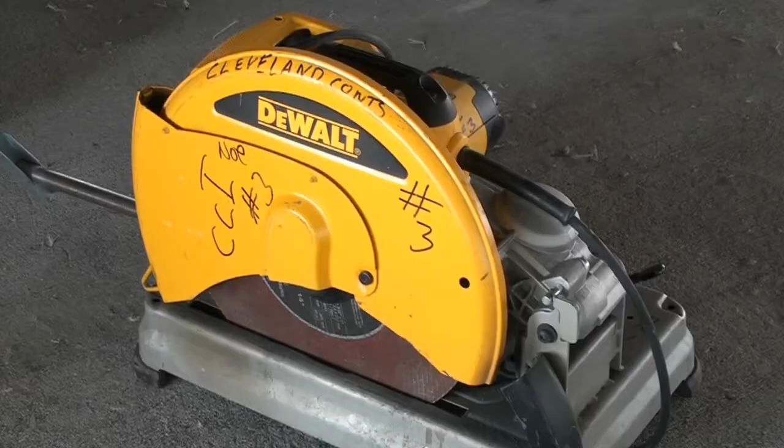The exposed moving parts of all power tools need to be safeguarded. Safety guards must never be removed when a tool is being used. Portable circular saws having a blade greater than 2 inches in diameter must be equipped at all times with guards. Ensure that all guards are installed and working properly.

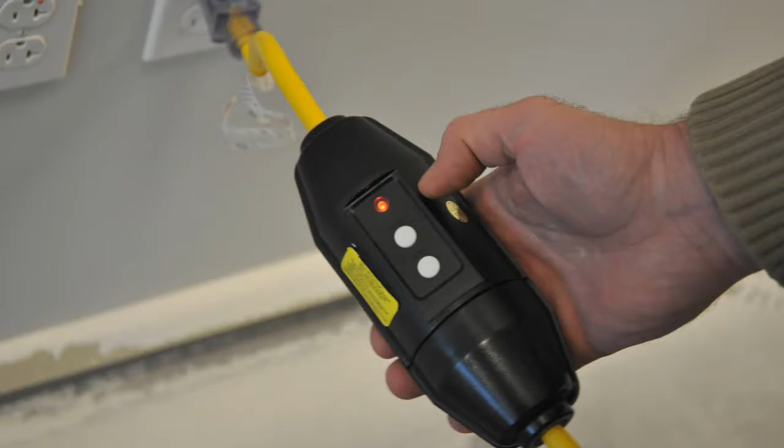Power considerations. OSHA has identified electrocution as one of the top 4 causes of construction fatalities. All receptacle outlets on construction sites used to supply power to electrical equipment via an extension cord must have a ground fault circuit interrupter. Cleveland Construction requires you to inspect extension cords daily before starting work.

Check for breaks in insulation, missing grounding plug, insulation pulled out of the plug, and other damage. If you find damages, do not use the extension cord until it is repaired and approved by your supervisor. Your project superintendent shall ensure that all equipment is properly tagged out of service and removed.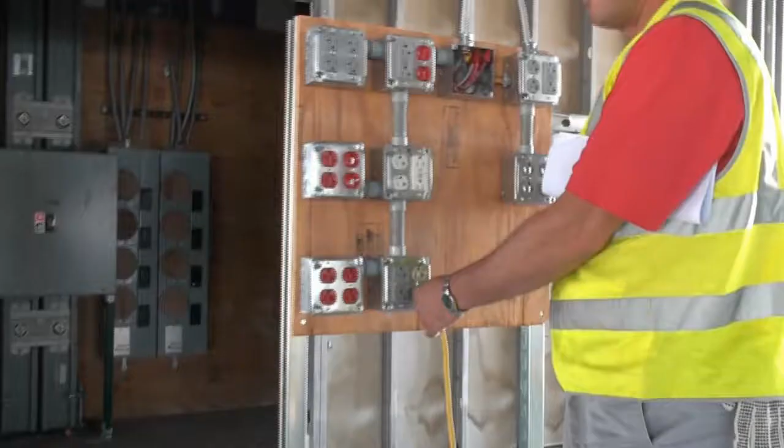Portable GFCI, ground fault circuit interrupter, shall be used between a power tool and any electrical outlet when an extension cord is used. The GFCI is to be tested at the beginning of each work shift by using the test and reset buttons on the GFCI.

When using extension cords on the job site, extreme caution must be exercised. Flexible cords must be used only in continuous lengths without splice, except for molded or vulcanized splices. Extension cords passing through working areas shall be covered or elevated to protect the cord from damage. All cords are to be positioned safely on the ground, which will prevent damage and trip hazards.

Also, extension cords shall not be fastened with staples, hung from nails, run over by sharp edges, or suspended by wires, which may cause damage.

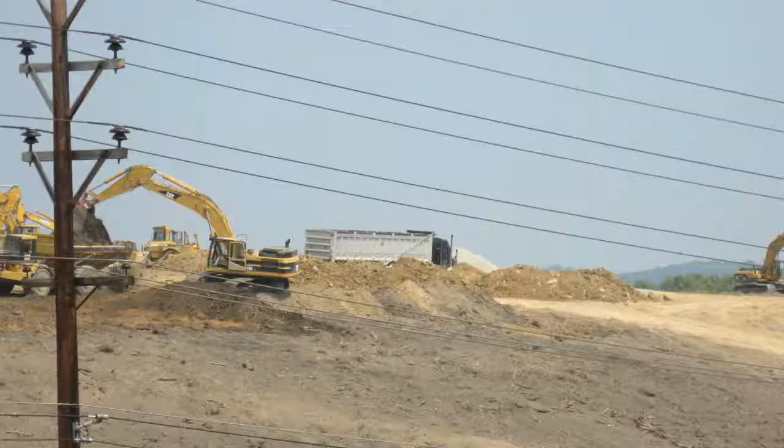Prevention of electrocutions. Extreme caution must be exercised when working around high voltage lines. When you walk on a job site, look for overhead power lines and identify existing utilities before starting work. Maintain a safe distance at least 10 feet away from energized power lines when operating any equipment to avoid possible electrocutions. Never operate portable electric tools unless they are grounded or are of the approved double insulated type, which are marked double insulated on the tool housing.

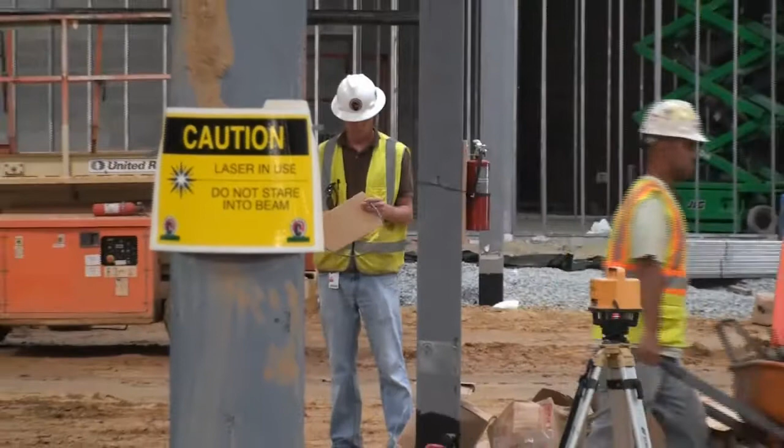Lasers. When operating a laser with an output of less than 5 milliwatts, you must be familiar with the following safety considerations. Post at least one laser warning sign at each laser location. Turn the laser off when it's not required or is left unattended for a substantial period of time. Do not look directly into the laser or point at another person. Set the laser up well above the heads of employees when possible. Otherwise, set it up well below.

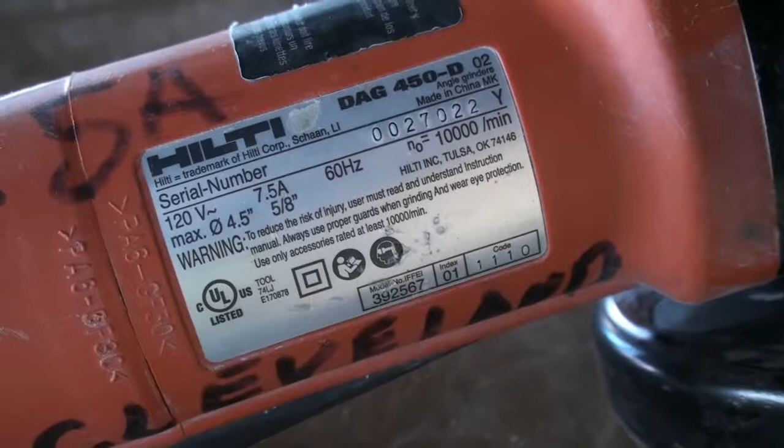Let's do a quick review of this lesson. Always follow all manufacturers' recommendations for the proper use of power and powder-actuated tools. When using powder-actuated tools, never leave a tool unattended, and if the tool leaves your hand, ensure it is unloaded. Signs will be posted to let you know a powder-actuated tool is in use, and you should pay attention to where it is being used in relation to where you are working.

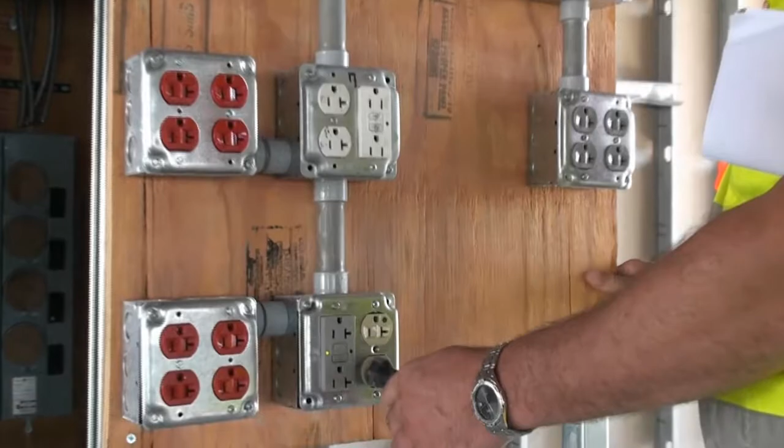Never remove a safety guard from any tool, even just for one operation. If a tool is damaged or not working correctly, it should be marked out of service and turned in to a supervisor. Always inspect extension cords, power tools, and ensure GFCIs are in place and working correctly to protect yourself from possible electrical hazards. Watch for signs indicating a laser is being operated, and remember not to look directly into the laser.

Lesson number 6, HAZCOM program. Many products used on construction sites are composed of chemicals or compounds that are hazardous to your health and physical well-being. You have the right to know about compounds or elements in building materials that may threaten your health. Cleveland Construction has developed a program to protect and teach you how to identify the hazards and handle them in a safe manner.

This program is commonly called a Hazardous Communication Program or HAZCOM program. Our program will inform you on each hazardous item on the job site, the dangers associated with these materials, how they affect your health, how to protect yourself against harmful effects, and how to treat yourself or others should someone become exposed to harmful materials. When you complete this training section, you will understand the details of your Right to Know Hazardous Communication Program developed by the employer, the two most common material labeling systems, the location of the MSDS binder and its contents, how to take appropriate action if exposure to hazardous materials occurs.

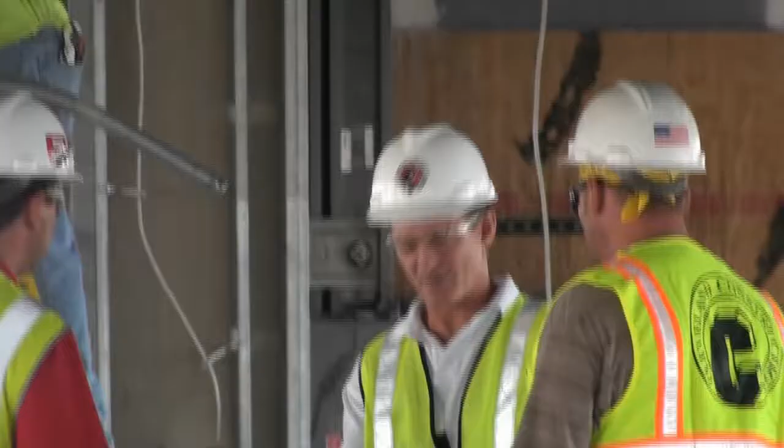Manufacturers of construction products are required to identify the hazardous elements in their products so you can avoid them. Two methods are used to communicate hazards to everyone on the job site: informative warning labels placed on the container, and a published analytical report for each product called a Material Safety Data Sheet, or MSDS, available on the job site.

Every product brought to a construction site must be labeled for identification. The label must describe the hazards associated with the product, how to protect yourself against those hazards, and a course of action to take when exposed to harmful ingredients. That section of the label is most often identified by the bold word warning.

The two most common labeling systems found in construction include the National Fire Protection Association's NFPA warning diamonds and the Hazardous Materials Information System, usually called HMIS labels. Both systems use a label with 4 colors and a space at the top for the chemical name. The blue, red, and yellow colored triangles or bars indicate the health, flammability, and reactivity hazard associated with the material, using a numbering scale ranging from 0 to 4.

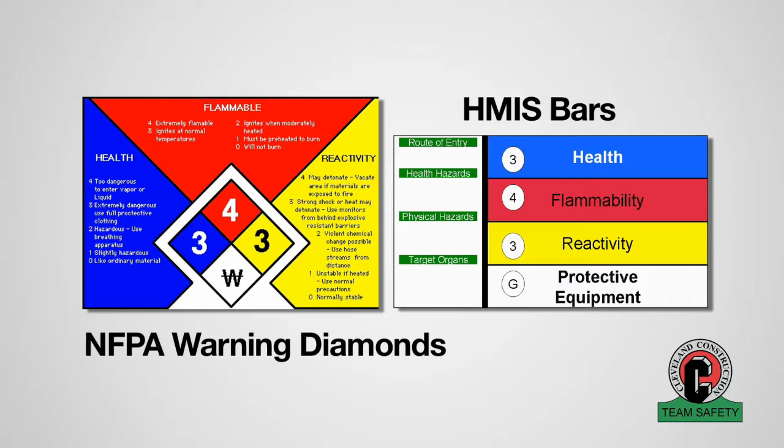A value of 0 means that the material poses essentially no hazard. A rating of 4 indicates extreme danger. The white-colored bottom triangle or bar represents other hazards or special protective equipment needed. Although the details of how numbers are assigned may vary somewhat between systems, this is essentially the same overall scheme as used in the NFPA system.

In addition to the labels, the manufacturer is required to create a document that thoroughly analyzes every element in the product, how the harmful elements can affect your health, what is needed to protect yourself, and what to do when a person is exposed to the product. The Material Safety Data Sheet, or MSDS, will be readily available for workers using harmful products.

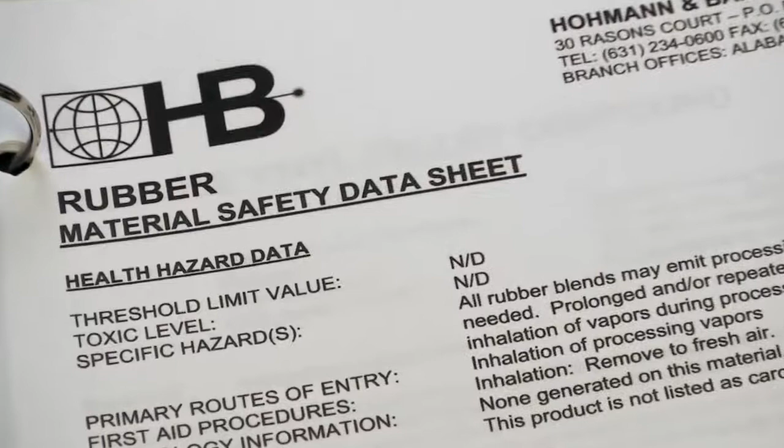The MSDS for products on a construction site can be found on the job site trailer of the general contractor. Inside the MSDS, you will find details on all the hazardous chemicals on the job site. MSDS sheets will vary slightly in appearance, but always contain 8 sections.

Section 1 includes the product and manufacturer name. Section 2 includes information on its ingredients. Section 3 identifies the hazards and potential health effects. Section 4 includes the recommended first aid measures. Section 5 includes firefighting measures. Section 6 includes accidental release measures. Section 7 identifies the proper handling and storage. Section 8 includes the exposure and control measures.

The MSDS is always available for your review if you have questions regarding your protection, treatment, or any other concern. Remember to pay attention to the materials you encounter for strange odors and unusual reactions to your skin, mouth, nasal or respiratory irritation, the feeling of lightheadedness or dizziness, headaches, stomach aches, and loss of consciousness. Hazards can cause many side effects and even produce unconsciousness or death if exposure occurs.

If you are exposed to the harmful effects of any product on a construction site, you should contact your supervisor immediately and request a copy of the MSDS.

Let's do a quick review of this chapter. You can prevent and respond to exposure from hazardous materials by reading labels and knowing the proper handling, cleanup, and disposal of various materials. You should also wear the proper personal protective equipment. Evacuate and ventilate any affected areas to reduce hazardous levels of the contaminant.

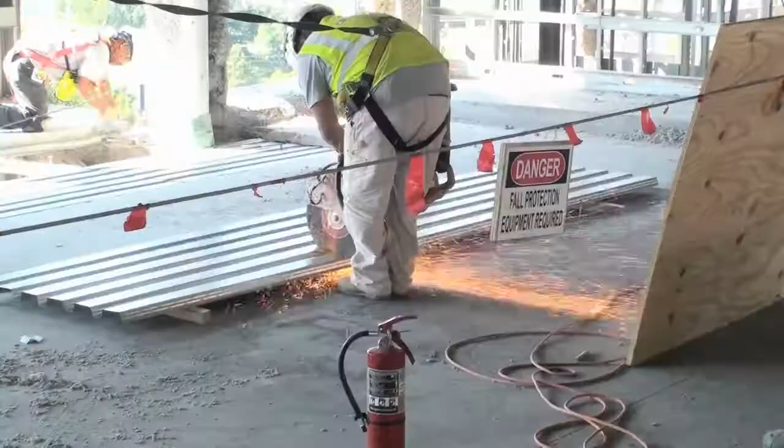Lesson number 7, fire protection. As construction progresses, fire hazard conditions constantly change. Practice fire prevention at work by keeping work areas clear of combustibles, controlling possible sources of ignition, and understanding the proper use of fire suppression equipment.

Fire extinguishers are provided for each 3,000 square feet of building area and within 100 feet of any given point in the protected area. It is important to remember that you should never attempt to put out a fire if it puts you or your coworkers in a situation of danger, or if you're not familiar with the fire extinguisher available on site. Smoking is prohibited at or near the vicinity of operations which could easily create a fire hazard.

When you complete this training section, you will understand the different classifications of fire extinguishers, how to use a fire extinguisher, evacuation procedures, and hot works permits. Fire causes: on construction sites, the potential for small fires are often caused by welding, cutting, grinding, and using flammable materials and portable heaters.

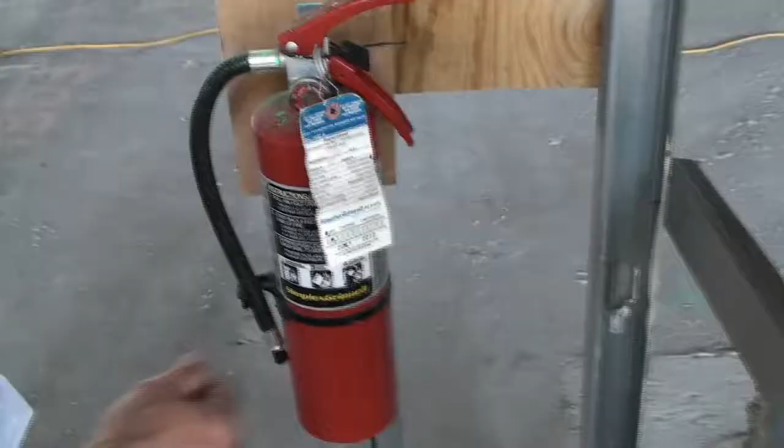Special attention must be given to prevent fires when performing construction activities involving flammables or combustibles. Refueling of portable power equipment, such as generators and other construction equipment, should not be done while the equipment is running or hot. Refueling should also be in well-ventilated areas, away from flames and other sources of ignition. Safety cans and cabinets must meet OSHA and UL listed standards for use with flammable and combustible liquids.

The following steps should be followed when responding to the early stages of a fire. Sound the fire alarm and call 911 if appropriate. Identify a safe evacuation path before approaching the fire. Do not allow the fire, heat, or smoke to come between you and your evacuation path. Select the appropriate type of fire extinguisher.

Fire extinguisher classifications. All fire extinguishers are labeled under specific classifications for the type of fires they can be used on. ABC fire extinguishers will be provided on all construction sites and can be used on all types of fires. This chart shows what extinguishers to use on various types of fires.

Class A fire extinguishers are used for combustibles such as wood, cloth, and paper. Class B fire extinguishers are used for flammable liquids such as gasoline, oil, and oil-based paints. Class C fire extinguishers are used for energized electrical equipment, including wiring, fuse boxes, circuit breakers, machinery, and appliances. Class D fire extinguishers are used for combustible metals such as magnesium or sodium. Be sure to use the appropriate fire extinguisher for the different classifications of fires.

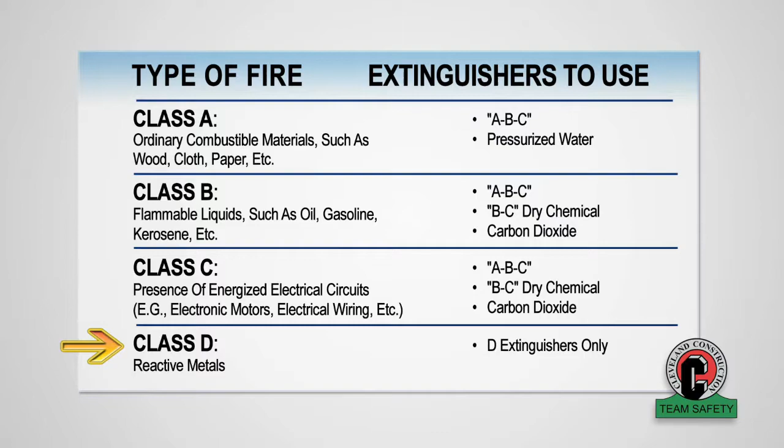Use the PASS technique when discharging a fire extinguisher within its effective range. A fire extinguisher can only be used for small fires. When using a fire extinguisher, remember the acronym PASS, which stands for pull, aim, squeeze, sweep.

Pull: the first step is to pull the pin that prevents the handle from being squeezed. Aim: the second step is to aim the spray nozzle, or if attached, the hose nozzle, at the fire, aiming low at the base of the fire.

Squeeze: the third step is to squeeze the handle to spray the contents. Remember, a standard fire extinguisher has less than 30 seconds of spray time. Sweep: the final step is to sweep back and forth as you spray the base of the fire.

Replace all fire extinguishers that have been discharged and give them to your supervisor. Evacuate immediately if the extinguisher is empty and the fire is not out, or if the fire progresses beyond its early stage. If you have the slightest doubt about your ability to fight a fire, evacuate immediately.

Hot Works Permit Requirement. Hot Works permits are required by some employers to control welding, burning, cutting, and other spark-producing activities. It is your responsibility to find out if you need a permit for your work operations if they produce sparks. When working with spark-producing activities, you are required to have a fire extinguisher in your immediate work area. It is also important to leave the building when the alarm sounds and head to the designated safe area identified by the superintendent.

Let's do a quick review of this chapter. Remember, if there is a fire, sound the alarm and call for professional firefighters, and go to the designated safe area. If you're using a fire extinguisher, remember the PASS technique to put out small fires. While fires can cause damage to the structure and construction schedules, the greatest loss is personal injury or death.